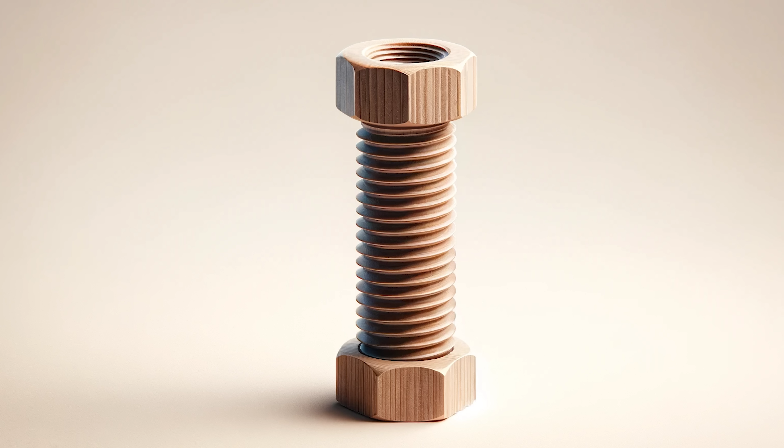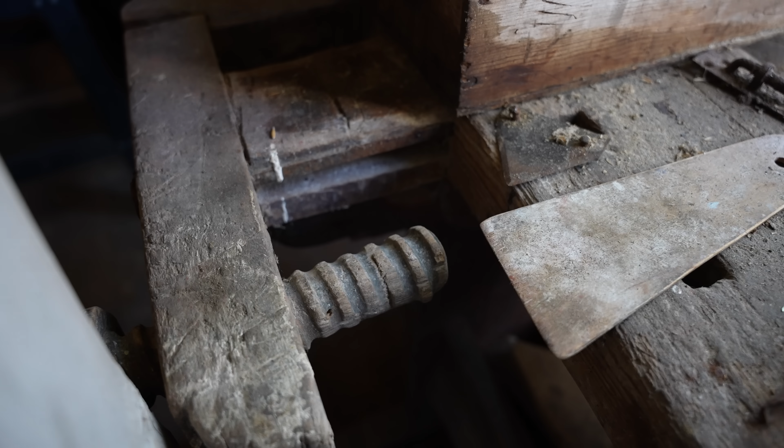I wanted to make threads on wood and found a tool that would cost me $1,000. Yeah, I know, thievery. I'm trying to make a dream project of mine, and making threads on wood is the first part of that dream. If I can't make the threads, I can't make my dream come true. But to give you a small hint... It works! It works! It actually works!

Okay, so I have an upcoming project. It's like a dream project to me, where I want to make threads on wood! And is that even possible?

Yes, of course, and if you ever come across a really old workbench like this, there's a big chance that the vise might just have wooden threads. The only problem is they're really hard to make and require special tools.

By the way, this workshop is freaking awesome. Look at how old this stuff is.

I started researching on how you would go about doing the threads, but I don't have a lathe, as you can see. And even if I did, I would have no idea how. The other idea was to use a tap and die. Normally that's what you would use on metal.

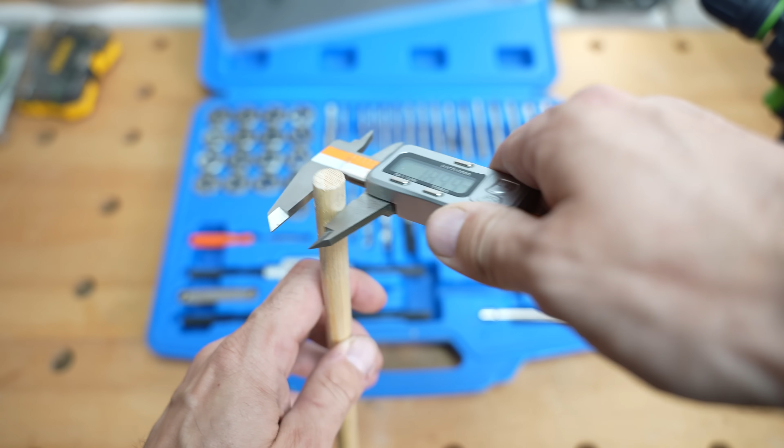Well, I did find a tap and die specifically made for wood, and that would fit the 44mm dowels I have. But the price? €990. That's just too much for one tool that only lets me do threads on 44mm dowels.

Because after this project I might never ever need it again. And I doubt the second-hand value would be as good as like Lego Star Wars. So another downside with the tap and die is that you're using hand force to spin it.

Come on, cows! I need to go check the cows. Let's see what they're up to. Go away, go find some food. He's going, what are you looking at? Yeah, go ahead, you guys follow him. Go ahead, go ahead, get off. Go ahead, look at this calf. What's he doing? What are you doing? Why are you in the concrete barrel? Huh, what are you doing?

Which means you also have to rely on really sharp tools, but even then, sometimes the wood will splinter anyways. And to prevent that, a lot of people soak the wood in mineral oil beforehand, which means kind of saturating the wood with oil.

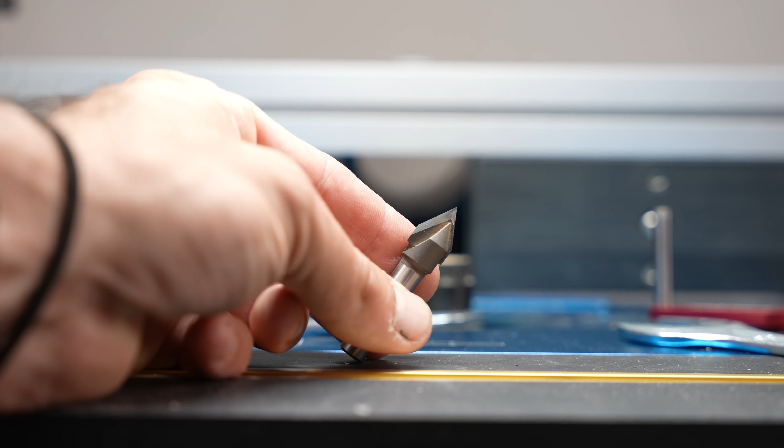I did a quick search and found someone who made a 3D printed jig that kind of goes on top of a 60-degree V-bit in the router table. You simply push the material through, and as soon as it starts cutting, you can start rotating, and it'll rotate into the threads of the 3D print. That would create the rest of the threads on the dowel.

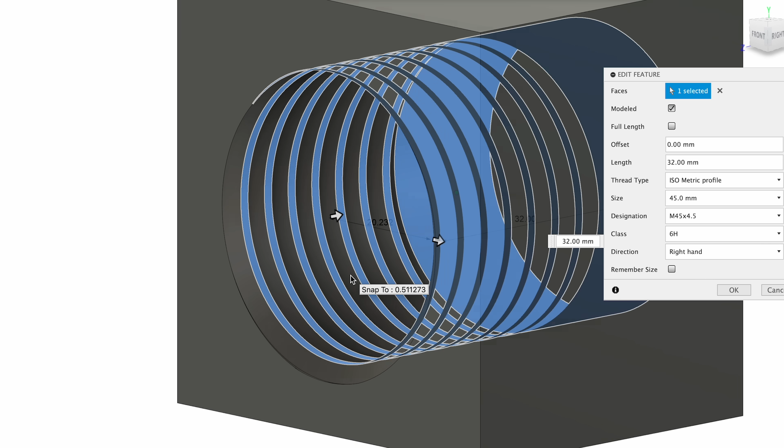So I guess I'll start there. I'm designing in Fusion 360, which is a CAD software, and I've made the jig that will accept the dowel, but the problem is that the threads in the software won't really match my V-bit, and I actually want the external threads of the dowel to fit the 3D printed threads, if that makes any sense at all. You just have to watch. I don't know why I thought I would be able to do this.

I might have to do some actual research before I continue. Maybe this will require too much of my engineering capabilities. I'm not an engineer, by the way. I'm a self-taught idiot in a garage, which isn't a garage, so there you go. I love my life, let's get on with it.

I spent some time looking at the computer, and then I decided to overcome my fears and just fix it. After some Googling and investigating, I found what could be a solution. See, happy again, like a child.

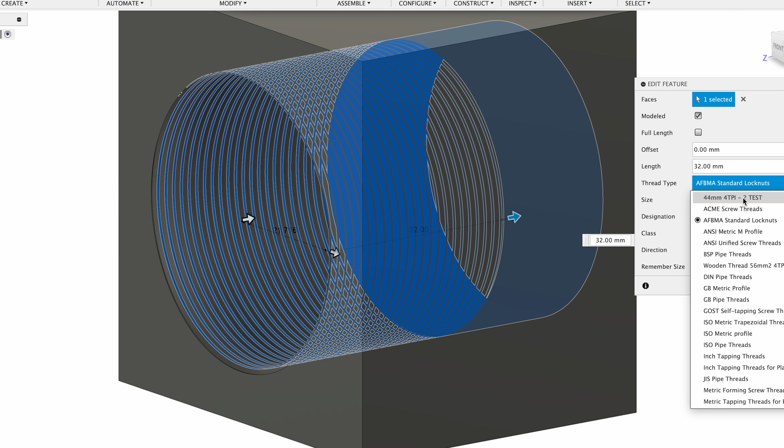It kind of feels like hacking the program, but I found the location for the thread sizes in this program, and they were all stored in hidden different XML files, hidden somewhere inside a library folder. It's obvious they don't want you to tamper with these files, but who cares? So I figured I'd just make my own XML files with my own measurements. I've changed the thread sizes, and now when I go to make the threads, I can choose my own thread size file, which is right there in the program, and it creates the threads I want to make. Look at it, it seems to work, but will it work in real life?

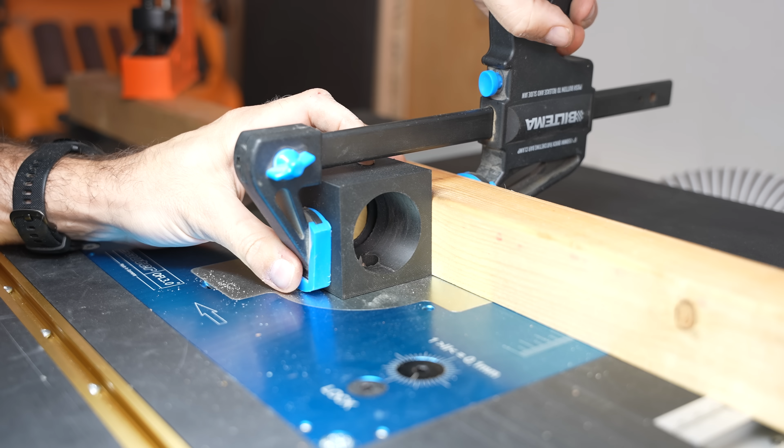Okay, so here's the idea. I have my 3D printed jig, I've clamped it down. I have another jig that I 3D printed right here. It's just a hole to guide the dowel so that I push it straight towards the bit. I've replaced my fence with this 2x2 to be able to clamp these parts. I've raised the bit so that it's the same height as the 3D print. And yeah, I think I'm ready to try it out. And what could possibly go wrong?

So the problem is that it won't start threading. It might just actually be the location of the jig, so I'm just gonna move it slightly closer to the threads, and then just try again. It's not gonna work, is it? Where's the other jig? Try again, please.

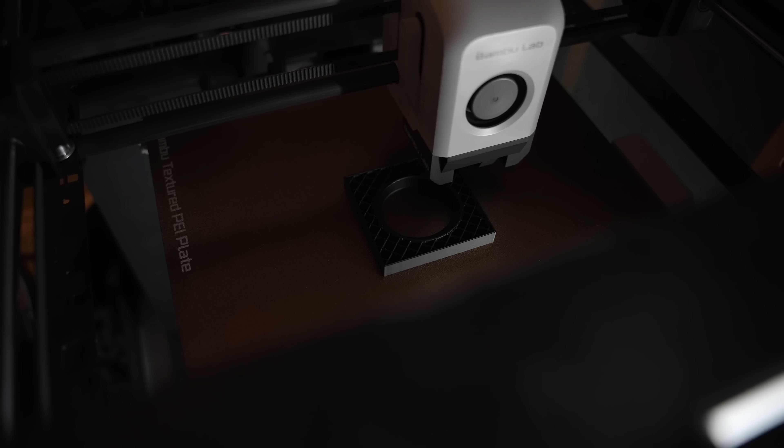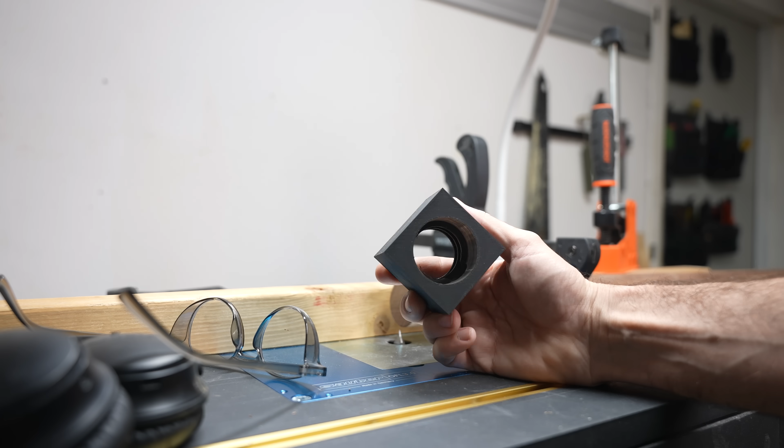Okay, so here's the new jig, I'm gonna try it out. Now I have the threads starting at the center, so hopefully that will do its thing. So I'm just gonna align it, clamp it down, and let's get to work.

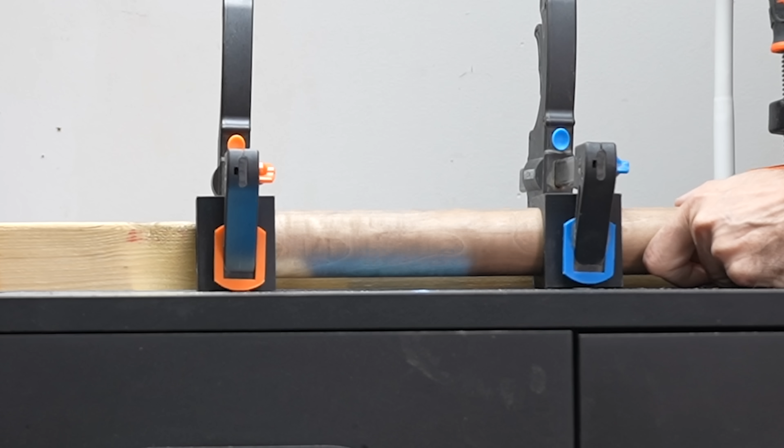Slightly off like that, maybe that'll do it. It's just cutting the edge. I don't think this is actually gonna work.

I think the problem with this idea is that I need to force the dowel into the threads of this 3D print. It would be better if they were just cut freely like this, right? If I could cut them like this, like if the threads were here instead of there, that would work. Another option would be to raise the bit up a bit, but then grind down the absolute tip. But that seems like ruining all my options if I break the bit. So I'll do that as a last resort if nothing else works.

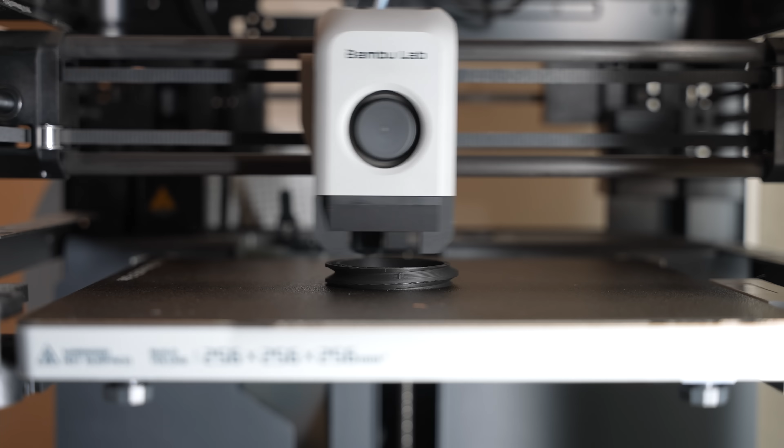Okay, new plan. I have 3D printed this, which goes on top of the dowel, and I already know a couple of issues. One, this is so tight, I can't get it off, so for the next version, I need to change that, it can't be this tight. Second of all, it's gonna go through this, which is going to spin on the threads. That way I can just spin this through the router bit without having this part going into the threads some way. I'm just gonna clamp this down, give it a try, and I really hope this works, I really hope this works. And as before, I have an extra 3D printed piece just for support.

This was progress. It actually looked a bit like threads, but the pitch height was off, and I had too little support, so I decided to print a new jig, this time with a hole in it for a screw to attach it to the dowel.

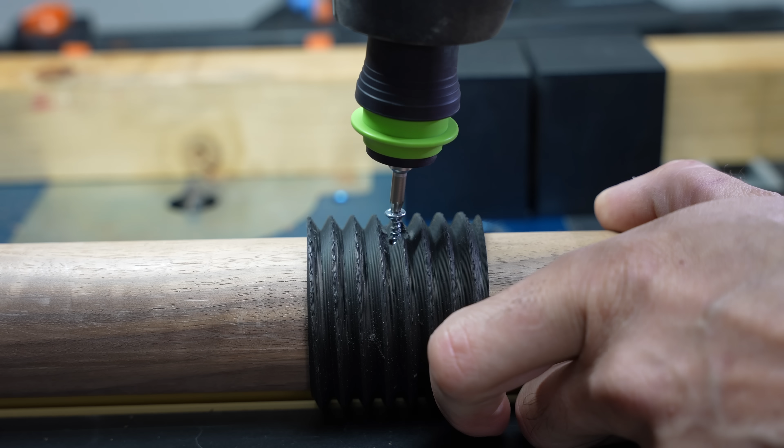So this time around I've attached the threads on the outside with a screw, made them a bit looser so they would come on the dowel easily. I've got the thread box, I've got the support box. This time though, I'm gonna do it a bit differently. I'm gonna have the support box at the front by the bit and the threads way back, because I realized they don't need to be at the front.

Excited, let's try it. I hope. I have some confidence at least. I shouldn't say hopeful, but rather confident.

It works! It works! It actually works! Oh, it works! Look at it, that doesn't look too bad at all, does it? I mean, I think I need to go a bit higher with the bit, but that's not too bad.

I mean, look at this. With a bit of sanding, let me show you. This looks so good. Could you see that?

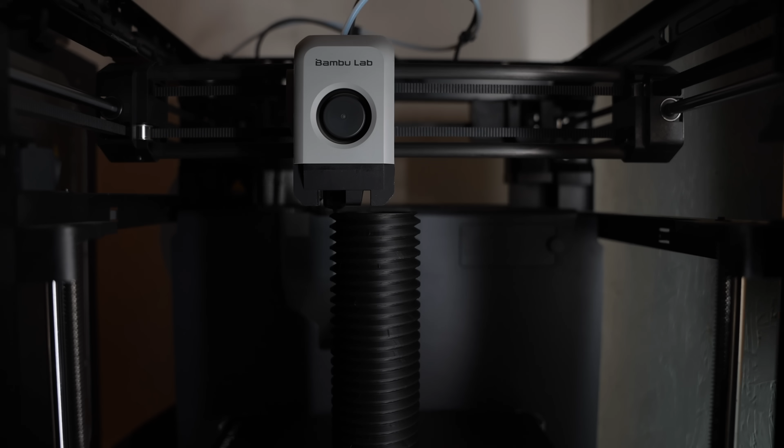To make the threads longer, I tried printing two sets of threads. I had them threaded onto the dowel, and then I just kept routing the entire length, and I ended up with this.

Now, the cliff. Well, as a YouTuber, you need to think about the thumbnail. And I thought it would look cool if I held the dowel with the threads, looking over the treetops and the sky. So I climbed the mountain, but accidentally dropped the dowel.

The dowel rolled off the mountain, and unfortunately I have no footage of that. I had to climb down. Eventually though, I did get to the dowel, and fortunately for me, no dowel was damaged during the making of this video.